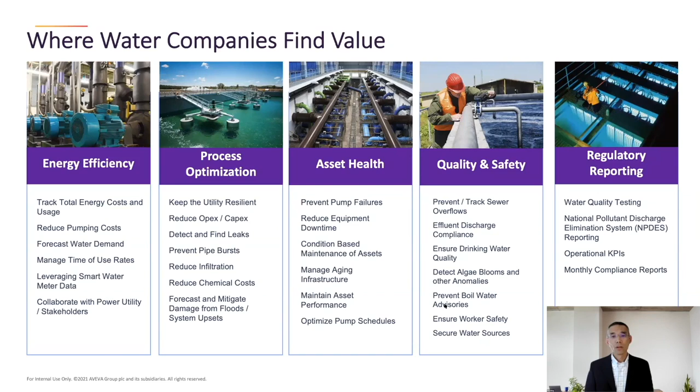However, there have been challenges, as you may know, when it comes to data and having data-driven decisions for that situational awareness and having informed decisions based on data. A lot of times we've heard some of these issues, and we actually surveyed over 200 water utilities, and we asked them, what are some of the data challenges that you and your business face? And number one, by far, at 61%, was the ease of access to data, followed by the amount of data, data silos, and then manual data.

So with our solutions that we're showcasing today, not only out of the box do you have the ability to basically erase all those data silos, but you'll have easily accessible data with a lot of context in applications and solutions that are driven for specific use cases, as you saw in the previous slide. At the same time, we understand as part of the survey that 79% of these utilities thought that the industrial Internet of Things was really important to them. And also we're going to address security as well.

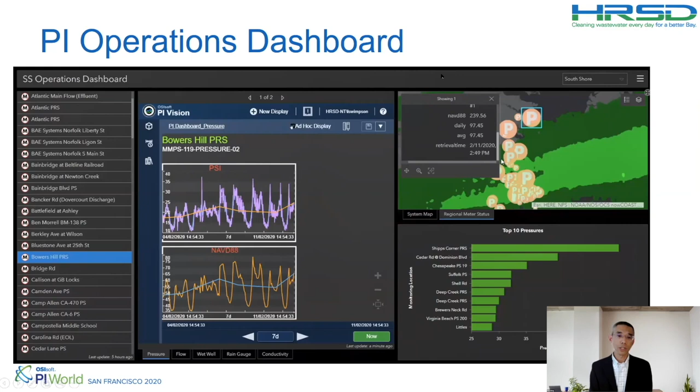They were able to increase their pump efficiencies from less than 70% to over 82%. They reduced the amount of pump throttling, which was greater than 50%, down to only about 10%. And at the end of the day, they were reducing their energy consumption by about 6%. So again, these are very measurable results achieved by our customer.

And I just really wanted to put you in the right frame of mind to see what GTS is going to present in terms of the applications, and afterwards open this up for discussion, your feedback and Q&A. So with that, I'll hand it back to Jessica.

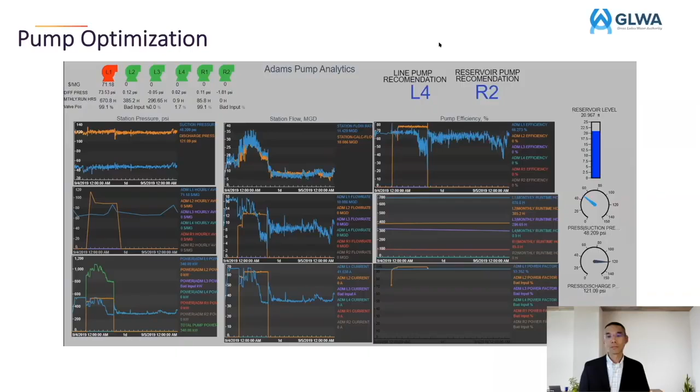I'd now like to introduce our second session with Steve Hoffman, Director of Sales and Business Development APAC at GTS Group. Steve has more than 30 years experience in the process control and real-time data management market, and he leads GTS Sales and Business Development team. In this role, he works closely with regional managers to expand GTS's presence and supports them to provide exceptional problem-solving real-time data solutions to the water sector throughout Australasia.

Joining Steve from GTS Group are Andrew Todd, Chief Executive Officer, and Archie Gale, Head of Innovation. Andrew is a founding partner and CEO of GTS and a familiar face as the presenter at OSIsoft and GTS seminars over the years. With a background in software development, PI system configuration, project management and business development, Andrew is driven to ensure GTS provides customers exceptional services and builds trust by consistently delivering high-quality technical solutions.

We also have Archie Gale, who is the leading expert and recognised leader at OSIsoft technologies within Australia. He has provided training to many of the PI system users in different levels in the utility space to best extract value from their data. He offers expertise in integration of advanced technologies in real-time data solutions to provide specialised analytics capability, machine learning, and specialist reporting and integration services, along with IIoT.

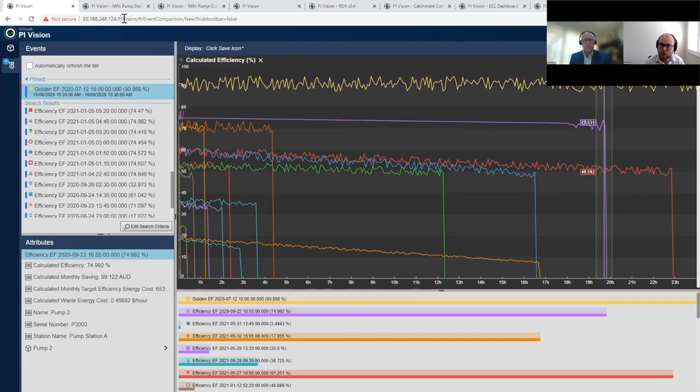So with this understanding of how we are actually maintaining these assets, I'd like to look at this in a greater context. How well do these pumps perform continuously, rather than just inside these event windows? For that, I can go to this much larger dashboard.

Here I've broken it up into a few different sections, namely the first one with nameplate asset data: the manufacturer, the classification of the pump, rated power consumption, and how long this has been running since installation, those lifetime run hours. From that, I also have my install date and the last maintenance event. I maintained this towards the end of August in 2020.

Following that, I've also got some operational characteristics—less about what the pump was, more about whether we're running this in a compliant manner. How long has it been running this month? How many times did we start it yesterday, or how many starts this month in total? How long are we running it for? What are the actual operational characteristics, including how much it's costing us to run this month? Here I can see we're sitting at around $1,100 just to run the pump for this month alone.

Following that, there's the more traditional SCADA data, those sensor values. Namely, what's the pump running at? What's the temperature, the status code, pressures, flow rates—all the information we'd expect to be measuring, which gives us greater context to these more derived metrics.

From here, I can see that things are certainly looking expensive. We're having a ramp up here in our monthly energy cost. We're also having these drop-offs in our discharge flow rates, our suction pressures, and our system calculated efficiencies. So what I'd like to do is look at these metrics in greater detail.

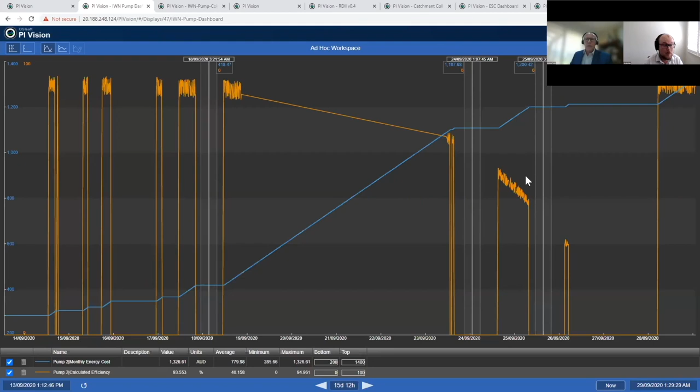So at this point, what we actually have is a demonstration of how well, or how poorly, the pump is performing as you start running into these more and more expensive and worse performing states.

A further question I might have is, well, how well does this pump perform compared to other pumps within my facility? For that, I've got this larger collective view of all 3 pumps at Station A and all 3 pumps at Station B.

Within Station A, I can see that while the alarm was initially triggered on Pump 2 with this degradation of performance, Pump 1 is actually suffering worse than Pump 2, and it follows that very same trend profile. So it is also equally suffering with this degradation of performance.

Pump 3, however, appears to be offline and not running at this moment. But if I look at its efficiency trace, I can see we're always sitting around the 60% mark, with no real highs in our performance characteristics. So while Pump 2 and 1 are degrading, they actually perform better than Pump 3 whenever it's online.

And that's to say nothing about Station B. Within Station B, Pumps 4 and 6 perform quite deplorably, actually. We don't really get above the 10 to 20% efficiency mark on Pumps 4 and 6. And Pump 5 runs infrequently, typically only sitting around the 75% mark, so it's always oscillating around that alarm threshold.

So while Pump 2 was the initial alarm generation, I can see Pump 3 has some performance issues which warrant further investigation. But Station B in its entirety, I'd actually say, is a more critical issue. We must be looking to Station B to see why it's performing so poorly, especially Pumps 4 and 6, and what actions we can take to bring those back up to our allowable efficiency metrics. And I'll hand it back to you, Andrew.

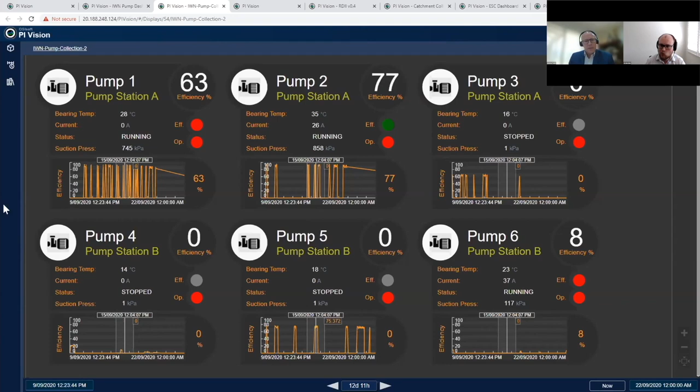Archie, I know we're limited for time today, but just before we push on, one of the questions I often get is whether we can look at a maintenance event in time, and with this cynical view that 60% of the maintenance is caused by... can we see a positive change prior to and following maintenance? Are you able to talk to that briefly?

Sure. So if I jump forward in time to the 29th of September, what we have here is on Pump 2, we've gone down and we can see that drop in efficiency, going to 30% or worse. But following the 27th of September maintenance event, we're actually back up to those 90% values, which is what we're expecting from our idealized trend profile.

So in this instance, I can see that when we did conduct maintenance on Pump 2, it was successful and we have returned back up to our ideal performance characteristics.

Thank you. Thanks, Archie. So I just want to say here that we're not going terribly deep into the full features. We're limited in time, so we're just spinning through this fairly quickly. Hopefully you can see from that demonstration that bringing these data sets together does give us some quite useful insights, and through analysis of those separate data sources can help us make some choices that reduce operational costs.

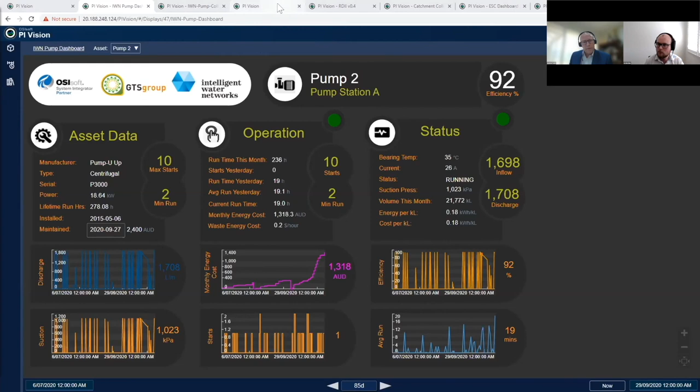Our next example is RDII, rainfall-derived infiltration and inflow, basically rainfall finding its way into the water treatment system, with the risk of adding stress to that system, potentially causing a spill and adding operational costs such as chemical and energy costs to treat water unnecessarily.

So this app is based on WSAA's recommended approach to RDII analysis. I believe that was originally provided in a spreadsheet form, and we're presenting this back as a more automated and dashboard process. Here we're actually taking a large volume of historical data and using the power of our back-end analysis engine to examine the typical effect of rainfall on water treatment plants.

This can help us direct remedial funding where it's most needed, based on evidence, to identify which catchment is costing the most, for example, or which one might be at greatest risk of a spill in a heavy or prolonged rain event. This replaces a complex spreadsheet that actually took substantial human effort to compile for analysis.

Thank you, Andrew. So to kick things off, we've got the same notification process here with an email alert. The reason for it is, just like with pumps, we don't always know whether this requires immediate action or can be deferred to a later period of time or to a different audience. So we try to make sure this email contains the right information to let the subject matter expert decide what the next actions should be.

So here we try to condense the useful information that comes across whenever we have a high flow event. Now, a high flow event, in this case at the North Catchment site, there are a few ways that can be detected. The first is the more traditional flow rate metric, where it's a high volume of water into the treatment facility, and that warrants action to be taken.

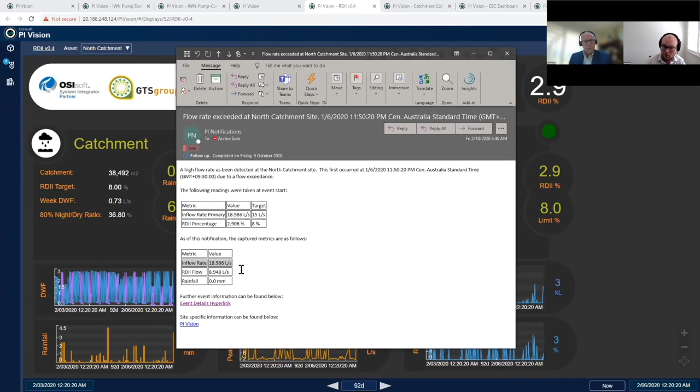So if I look at this event detail over time, just to see what profile we have for these inflow rates, I can see here, if I remove some of these limit metrics, that my inflow rate - yes, it was the original alarm coming through at that 18 or 19 liters per second mark. It did cap out at 20 liters per second, which was the facility maximum capacity. But at the 15 to 20 minute mark, we actually dropped back down to only around 4 to 5 liters per second, but the alarm was sustained.

And the reason the alarm remained open is because our RDII percentage picked up at that point. While the raw water flow did abate somewhat, we were still measuring a very high volume of rainfall into the system. In fact, it looks like it got to around the 14 to 15% mark, around the 20-minute mark of this event. So while it did not initially trigger as a rainfall event, it was sustained and did push forward with some strong rainfall components.

And with that knowledge in mind, knowing how this one event has been handled, I'd like to look at this in a greater context and see how well this actually performs over time. So within this dashboard, I've broken it up into 3 sections again, just like with pumps. So with my quote unquote asset this time, I have the catchment telling me what is the area we have in mind here, how large is this catchment, and what's our predicted dry weather flow. So if it wasn't raining whatsoever, what calculations do we have in the system to tell us what sort of flow rates we're expecting in the facility right now?

So we expect it to be fairly stagnant, fairly quiet, because it's not really a high flow window. In fact, looking at this dry weather flow graph, which we have underneath, we can see we're expecting 0 to 3 liters per second as an inflow rate to the system at a fairly predictable rate, depending if it's a weekday or a weekend. From here, we also have the treatment plant itself and its peak flow rates, any flow characteristics we have, in addition to the cost. So how much is all of this RDII flow costing us in terms of treating this water coming to the system?

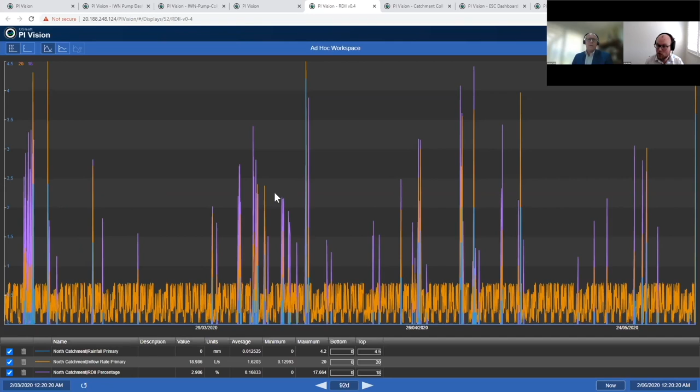So here, what I'll actually do is make a quick trend, just overlaying my rainfall, inflow, and RDII percentage, just to validate my concerns here that while they look to be correlating with each other, I like to overlap this data set and prove this to myself. So here I can see that we are getting a lot of these overlapping spikes over this 3-month window. And if I zoom into one of these spiked regions, I can see that we do have this characteristic behavior of a rainfall event kicking in.

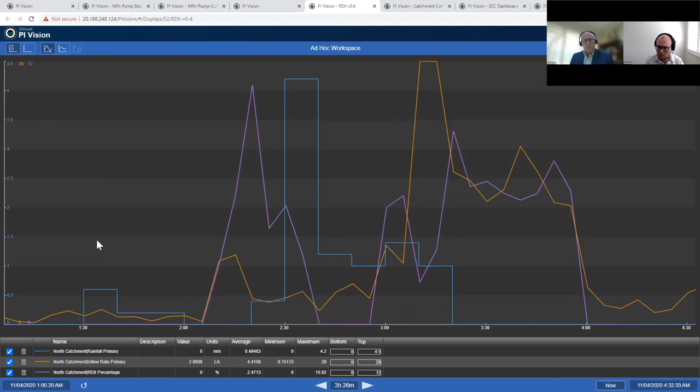We have an increase in my flow rate, and there's a demonstrable increase in my RDII percentage at some point later on. So there is definitely a strong correlation, even if there is some time delay between the two systems, between a rainfall event coming into the system, a measured increase in that flow rate, and that calculation of what that RDII percentage actually is. It's also worth noting that's with a relatively low rainfall event, because it's corresponding to a relatively low dry weather flow at that point. We do have higher rainfall events come across, which may not necessarily lead to higher RDII, but there is always this relationship with some form of rain. We are getting these RDII percentages in exceedance of our limits here.

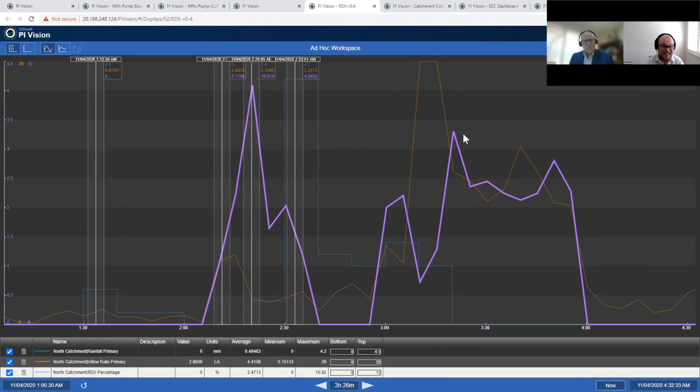So while I've looked at this one facility with its current alarm and its historical profiles, we have a north catchment. We also have an east, south, and west catchment areas. And within this profile here, what I can actually do is start contrasting these and see, well, how well is the water treatment handling costing us between these different areas?

So within North Catchment, we saw on the previous screen that it's around 38,000 square meters and $167,000. But contrasting this to East, South, and West, that's quite an anomalous relationship. That cost is disproportionately high to the catchment area. And in fact, if I look at the East Catchment, which is slightly more expensive at $171,000 this financial year, it's servicing a catchment area in excess of 1 million square meters. It's a dramatically larger region.

And in fact, looking at South and West, we can see that those are larger areas still compared to North, but cheaper in terms of treatment cost. And by looking at just this RDII percentage trend, it definitely illustrates how there's an excessive volume of rainfall entering the North Catchment compared to East, South, and West. Within South, West and East, we are very rarely getting in excess of 2%, let alone an 8% threshold, whereas North is sustaining a very, very high value.

So the first action to be taken with this is to see, well, what sort of lessons can we be taking from East, South, and West, and can we apply those to North Catchment to try and minimize our volume of rainfall that's actually entering the treatment facility. With that, I'll hand it back to you, Andrew.

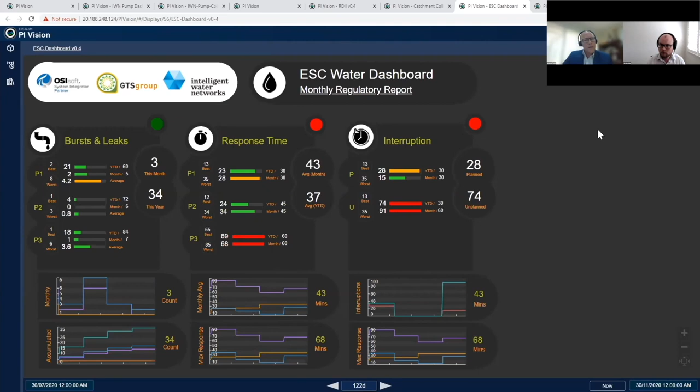The next app is all about water quality, specifically health-based targets in our example, and these are based on recommendations provided by WSAA, focusing on microbial water quality tests that indicate not necessarily a pass or fail, but whether there might be opportunities to improve water treatment practices. So once again, this was being done in a manual way. It was actually an intern would go through a stack of lab reports and copy the results into a spreadsheet, and then those results would be calculated to provide the answer.

And the reason for that is that we're not looking at the raw results from a single sample. We're actually looking over the course of a year to calculate compliance using analysis such as median values or 95th percentile calculations. So it's the history of the results and not just the individual. So some effort involved there.

What we showed was that the lab results can be emailed directly into the system. The data can be extracted, stored and analysed, and users can receive a message if there's any result that needs attention. So one of the effects of that is it actually means that the results are being looked at in relatively real time, as opposed to when somebody gets around to processing a stack of files. So quite a difference in process. Let's have a look at that one, Archie.

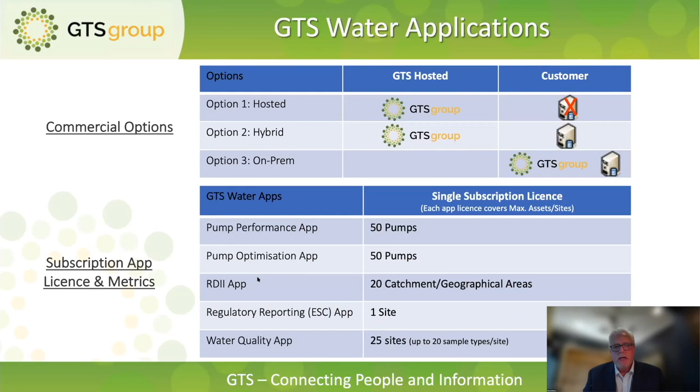Thank you, Steve. Terrific. Thank you, Archie, and thank you, Andrew, for a very good presentation and demonstration, showing really the capabilities of these applications which have been developed now over the last couple of years. So one of the things that obviously we need to look at, and I know we're running out a bit of time here, so I'll go through this quickly, is to look at the options.

And I think one of the questions that was raised is whether or not you need OSI technology within your premise. And the answer is no, you do not. We can actually host these applications within our Azure environment where these applications are hosted. We provide a data collection node and do an extraction from your systems into our environment.

We also look at, obviously from discussions with our customers, that they may already have a PI system, but they don't want these applications to be resident within that PI system environment. Again, the same concept applies, where we can do an extraction from their existing PI system into our hosted environment. And there are some customers which are already invested substantial amounts within their PI system, and would just like to facilitate the purpose-built applications, which are just templatized, and have them running with their own PI system environment.

So we do have these 3 options available for our customers, knowing that not everyone from an OSIsoft perspective, unfortunately, has the PI system at each site or within each company. From that, we have looked at a subscription licensing component, which means that you can start off small, purchasing one subscription license, which allows you to facilitate and monitor 50 pumps from a performance perspective, an optimization perspective.

RDII is based on monitoring 20 catchment areas or geographical areas. Regulatory reporting is based on a one site perspective. And then water quality allows us to monitor 25 sites. So when you buy another application, you can start off, for example, with pump performance. You can then, for example, look at regulatory reporting for that site. And these applications, as I said, can evolve over time.

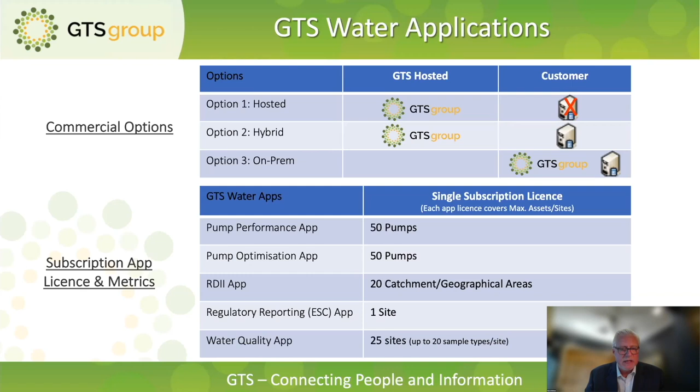And the thing that I must remind is what you see and what's being presented is what you get. From the visualization to the analytics which have been applied, all we're looking to do is to connect to your data sets, and they may be all contained within one area of your system at the moment or disparate areas. But as part of the delivery of this, there's an engineering component, which we do, and we work with the customer to find where those data sets are, extract that information, and then associate that information to the applications that you've seen here today. Next slide, please.

So in summary, primarily the goal of this is to provide a solution as a service environment, a SaaS environment, different concept rather than software. It's now a solution to really look at the common challenges that a lot of water utilities have and be able to solve them once and then replicate them across many. We are trying to do this and facilitate a more efficient delivery approach in engineering services, but more importantly, an application approach and a templatization of those applications to ensure that we can maintain, deliver, and support those applications for you once you subscribe to these services.

We are seeing this as a newer way of delivering solutions rather than bespoke single instance solutions delivered by engineering companies like GTS. And we also see this as very scalable. And again, reiterating, you can start small and evolve over time. So we find that very important, especially for what I would consider the tier 2 and possibly local government organizations which have a small water requirement to manage.

We can facilitate and do this outside of their domain and provide you with that service of all this technology back to you. We see that by having a shared subscription component, it allows a lower cost model to be made and delivered to all, and also making sure that it really minimizes you as the customer having to maintain this. And we're also seeing that as a bit of a trend, that a lot of people are assigned to do different things. They can no longer be the master of one. So we're actually allowing ourselves to be that master on behalf of yourselves.